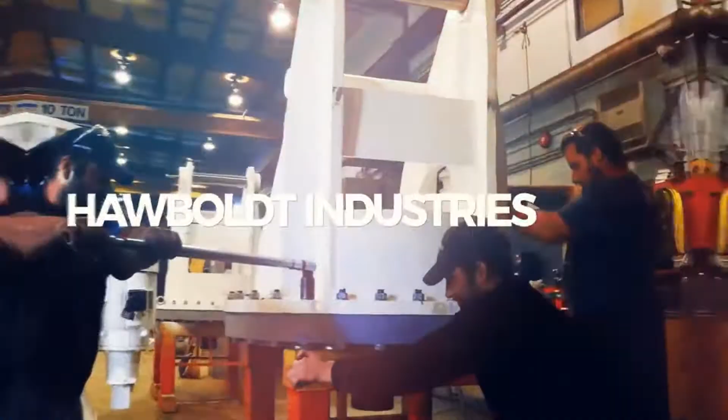Very impactful video there you produced. Some of the visuals that people saw in there look like some large equipment that you've produced.

You'll see in there our tagline, "Design, Built, Marine," which kind of encapsulates what we do. We're an engineering company that builds our equipment here under one roof. We've got our sales and engineering and a whole production facility, with about 40,000 square feet of manufacturing space, and big equipment that goes out these doors for different applications in the offshore, workboat, research, and defense industries.

That includes things like ROV launch and recovery systems you see in there - winches and specialized cranes that launch underwater vehicles, work-class ROVs, for example, as well as AUV launch and recovery systems. There's a quick snip in there of some AUV LARS, launch and recovery systems, that we sold to Ocean Infinity.

Ocean Infinity is a pretty big name in the survey side of things for sure. As well as winches that go really deep, like 10,000 meters of wire on them, very specialized for getting water samples deep in the Pacific Ocean, ranging from pretty small stuff, maybe a couple thousand pounds, up to the biggest - I think the biggest single piece of equipment we've ever made is around 180,000 pounds. So a lot of steel work, heavy loads, and FEA analysis and testing is a big part of it too.

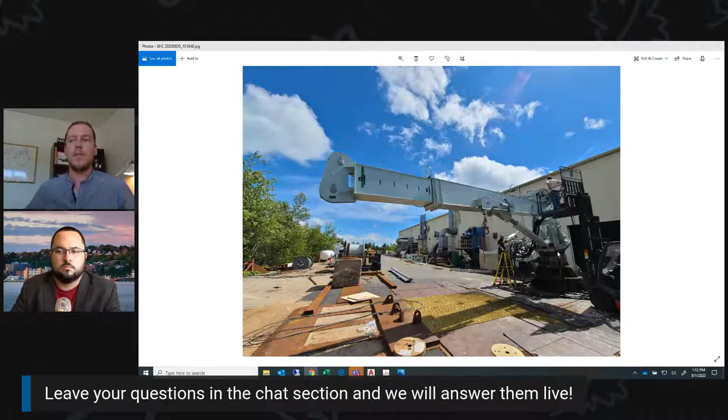What we're trying to do is simulate that pitch and roll motion of the ship. You have to be able to move the crane kind of uphill when you turn it with the load, and the best way to simulate that is with an angled test base. So you're fighting against gravity the same way you would if the ship was rolled over at 20 degrees.

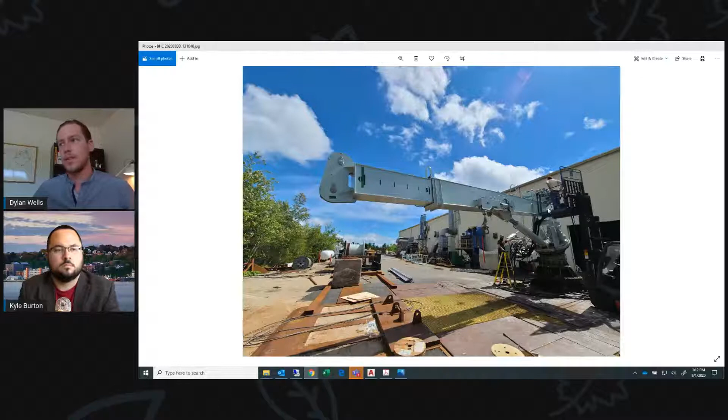Here's another angle from behind, so you can see Chase, our design engineer, is halfway up into the control pedestal. It's not a comfortable angle to control from, so there is a remote electric-over-hydraulic control as well. It's definitely a weird sight for us compared to some of the more normal marine cranes that don't see this extreme of an angle.

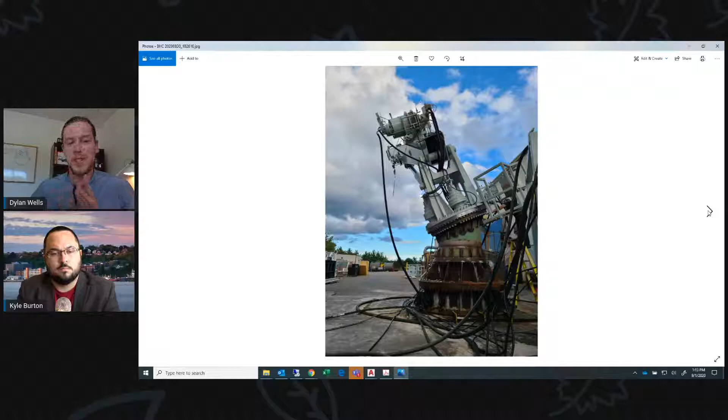It feels shocking to me, probably just looks kind of normal to someone who's not used to seeing these things. But here, another picture you can see.

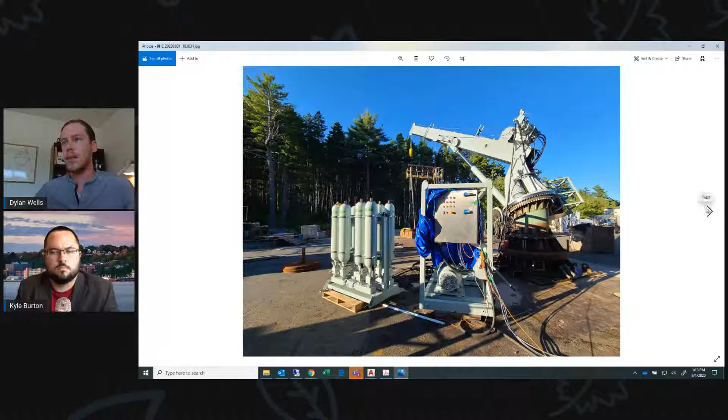For shipboard rules, we test at 25% overload, so the crane should never actually see this again. We're picking up about 16,000 pounds there - that's a big steel weight.

We run through all that stuff with our customers, and they get to operate it, make sure the fit and finish is as they expect as well. It's pretty fun, I've got to say.

Would this typically be one of your larger cranes, or what range would it be? This is maybe a medium size. The crane itself weighs around 30,000 pounds thereabouts, and it lifts 6 tons at around 10 meters - that's its capacity.

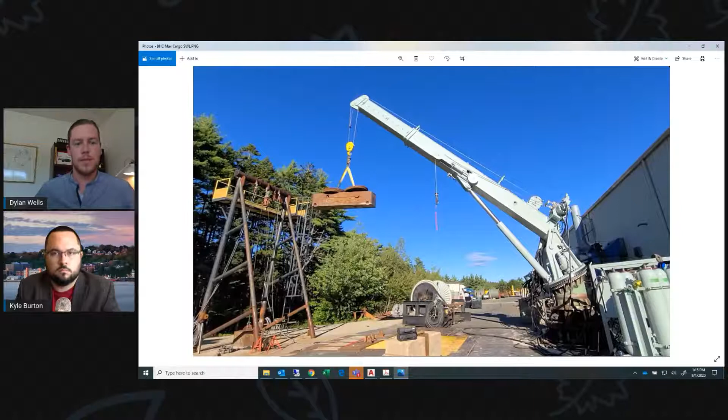Maybe I'll stop sharing that for now. Perfect, okay.

That's exciting, that project - you must be very excited for that to go forward, and it'll keep you guys busy for quite some time. Yeah, it's really, like I said, been a couple firsts for us, which is exciting. It's always a little nerve-wracking.

The winch, I guess I didn't talk about it too much, but as I mentioned before, it's fairly specialized. We've got a really large order for the Halifax-class frigates - they're doing some upgrades on those ships for the Canadian Navy.

They are putting new mission boats, essentially like Zodiacs, on there, along with new cranes to launch those, as well as a crane on the other side of the ship for more general purpose stuff. Each Halifax class frigate is getting 2 cranes, kind of similar to that, but a more compact version with basically the same winch and a lot of the same requirements.

We're building 30 cranes for that contract, which is underway right now, and it has a few new requirements as well because it's a warship - a frigate, not the supply ship. Any critical systems on those ships actually need to be shock tested, meaning they need to be tested and proved able to survive a major shock event like a torpedo strike.

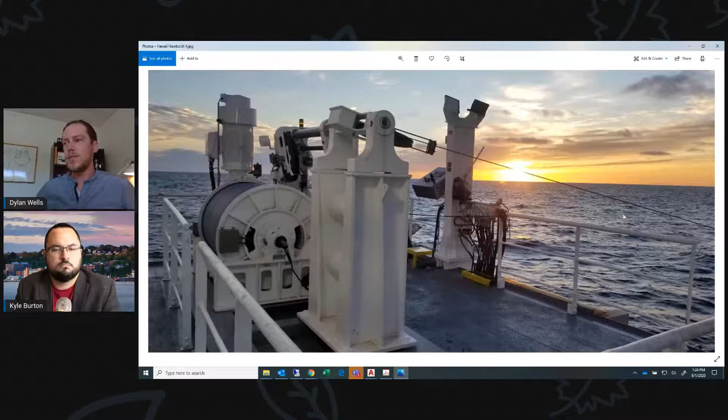Let me go to the next one here. So here's kind of a view of the operator control stand, and this is the crutch that the crane would rest in when it's not being operated. And here's sort of the main boom of the crane and the knuckle boom, and the boom tip goes way down to the water - you can't even tell where it is right now. That was something that was specialized for this vessel because they wanted to get the tip really close to the ocean, so when they pull their package out of the water, it doesn't have as much pendulum to swing before they get it recovered. So sort of a standard product customized a little bit for them.

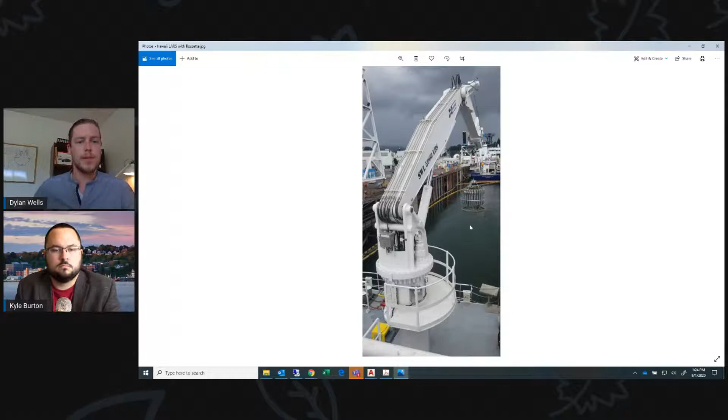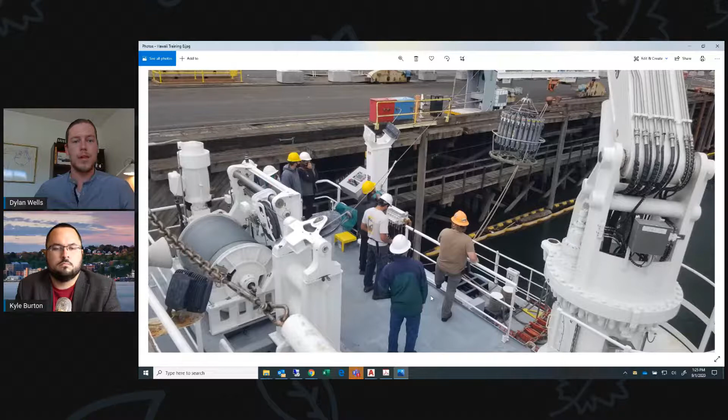Here's a better view of the whole crane, I guess, and this is a CTD rosette on the end. I think it's a 24 bottle rosette, so it can take basically 24 different samples of water at different depths. And our engineer and a bunch of the crew just doing some training. Because these systems are complex, we offer a lot of operator and maintenance training too - it's kind of a big part of getting a system started up, making sure everyone knows how to use it correctly, safely, optimally.

Yeah, so there it is, kind of stored, tucked in tight. The center line of the vessel is over here, so this is really not taking up much space on the ship. It allows them to do a number of other things with some other existing gear, giving them a lot of flexibility with this kind of crane design that's a knuckle boom with an extension onto it. So we're pretty proud of that project, and we know the customer's been really happy with it, and look forward to them using it for another couple decades, kind of thing.

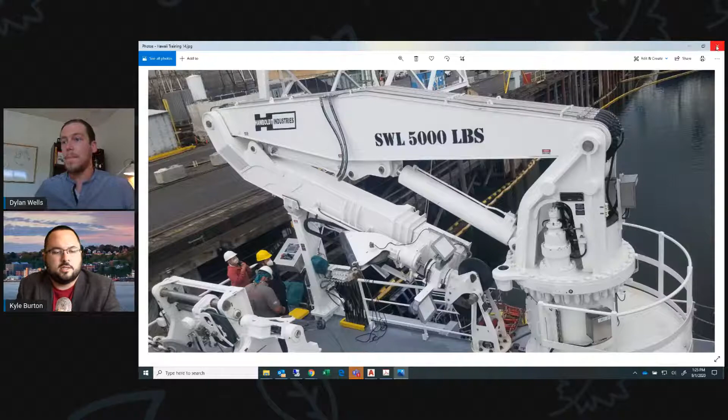That's pretty cool. I think we have a video of it in motion too, right? The same crane. Yeah, we put together a little video during our FAT. Probably the only time this thing's ever going to see snow, as we tested it around Christmas, and it shows it working together a bit. Perfect, I'll cue that up and play it.